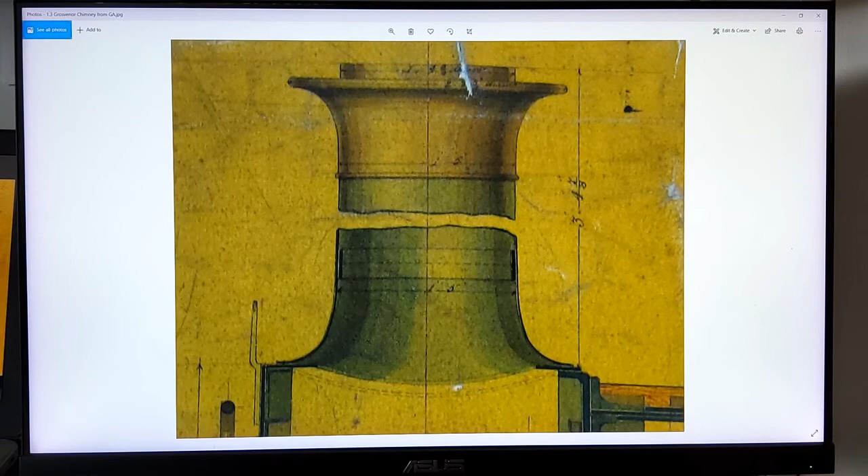To get research, I went to the NRM at York, photographed the general arrangement plan for this, and have also looked at some photographs, cropped them so I can see a little bit more detail on the chimney that I'm trying to draw.

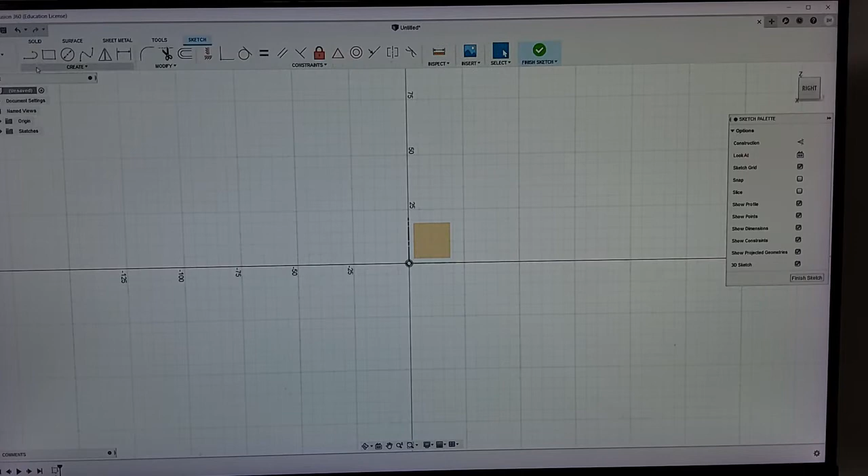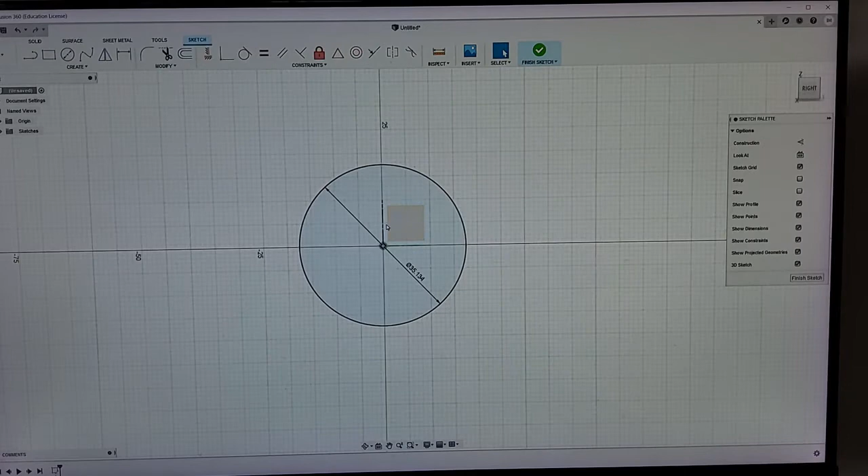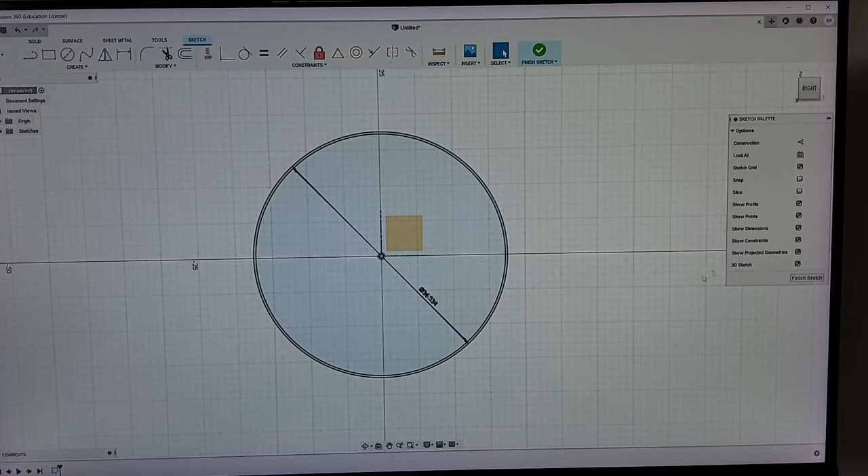And the second one I'm going to draw is slightly smaller than that, just to give us a bit of thickness for the smoke box wrapper, if you like. So 0.3 less each side is going to be 34.534. So I've got two circles, finished my sketch, put it in 3D, and I'm going to extrude that out to give me what looks a bit like the smoke box.

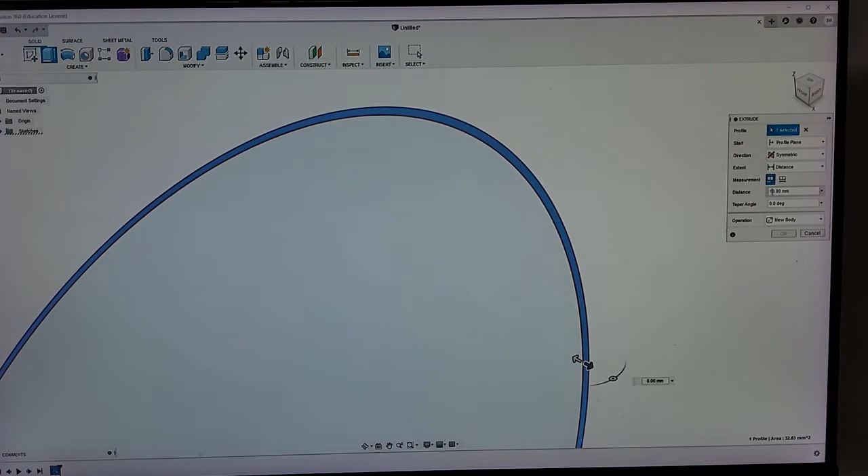I'm going to click in between those two circles. I'm going to have a symmetrical extrusion, and I want the symmetrical extrusion to be 20mm in total, which is 10 either side of the centre line. So that's what I've got there.

Click on there. I'm now going to draw on this top plane here another circle, and this time it's going to represent the size of the base of the chimney where it intersects with the smoke box here. So on my chimney it's 2'4", which in 7mm is 16.333. So that's that. Let me finish that sketch.

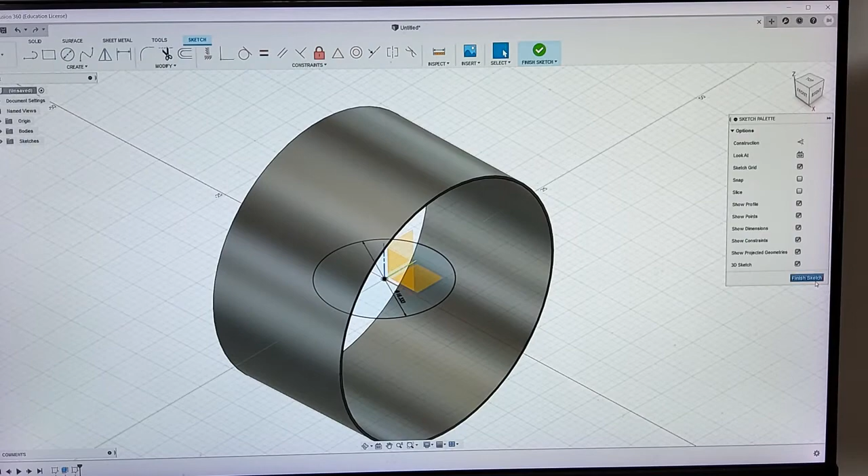And then I'm going to extrude that and bring that up through, and you can see it's cut a hole in the smoke box wrapper the size of the base of the chimney flare. Well, I don't want that to happen. I want to actually have the bit that's cut out. So you just click over here on the operation, change it from cut to intersect. So that's what we've got now. Click OK.

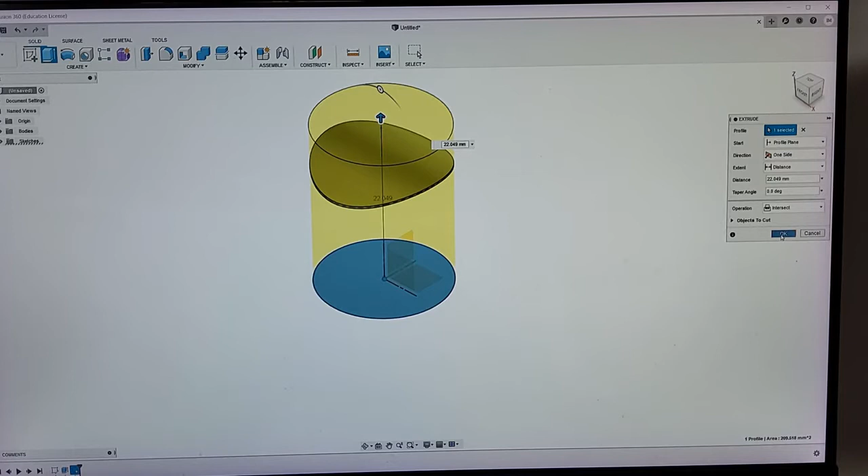The next thing is to put in some parameters so that I can move things about in a minute. So we have change parameters on the modify command, and click on the plus button, and the first one of these is going to be called height, and I'm going to have that as 2.6mm, and that's going to be my flare control height.

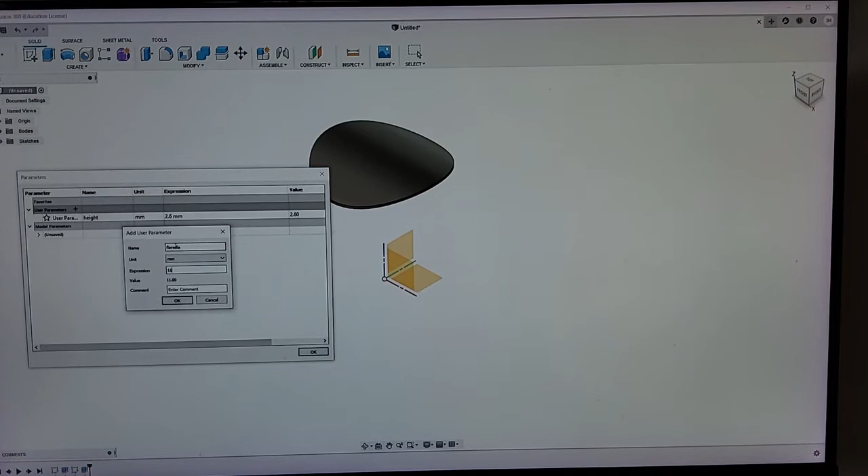And the second one is going to be the flare diameter, and I'm going to put that in as 11mm, and that's the flare control diameter. And I'll show you those in use in a moment.

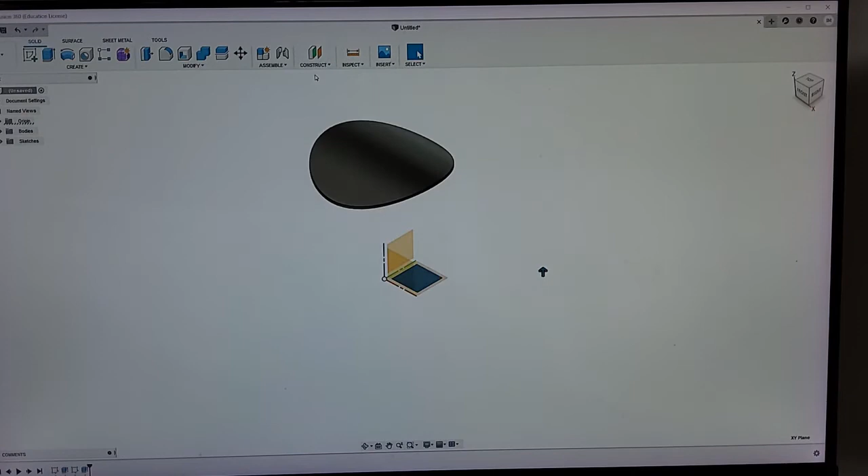Now from this plane here, I want to put some offset planes, and the first one, you can see I've got a thing up here. First one's going to be 22 millimeters above the centre line of the smoke box, so that's fine there. I'll just show you that from the front. Oh no, that isn't the front, is it? There's the front. That's the curve of the smoke box, and I've just put in this line up there to give me an area to work to.

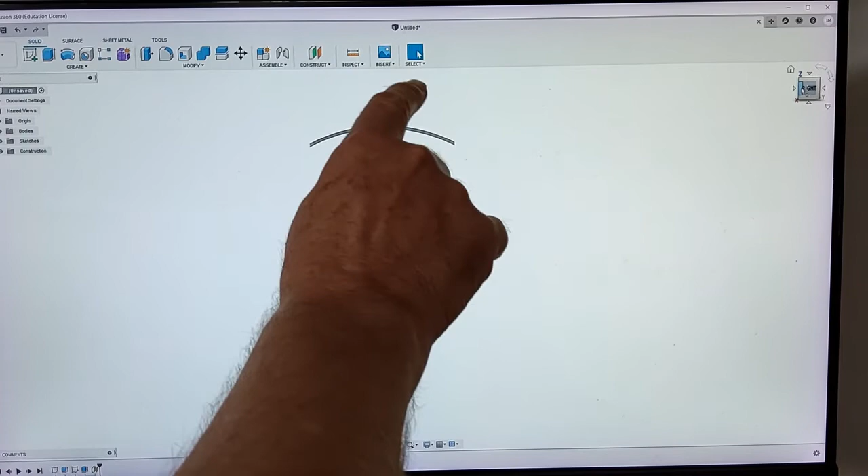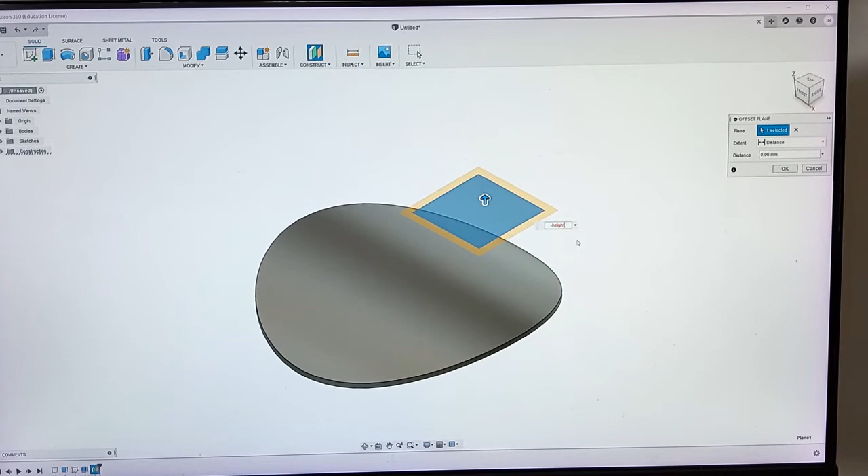And then from there I'm going to drop another offset plane, and this time instead of a dimension I'm just going to put in minus height, and you can see it's come up height user parameter underneath there, so I put a minus sign before it, click on there and it comes down and you've got the 2.6 figure there. So I've now got two planes above the base of the chimney.

The top one I can draw the diameter that is the top of the flare or the base of the barrel of the chimney, and the other one I can put on my flare control diameter user parameter, and that will allow me to change the shape of the flare as and when we need to.

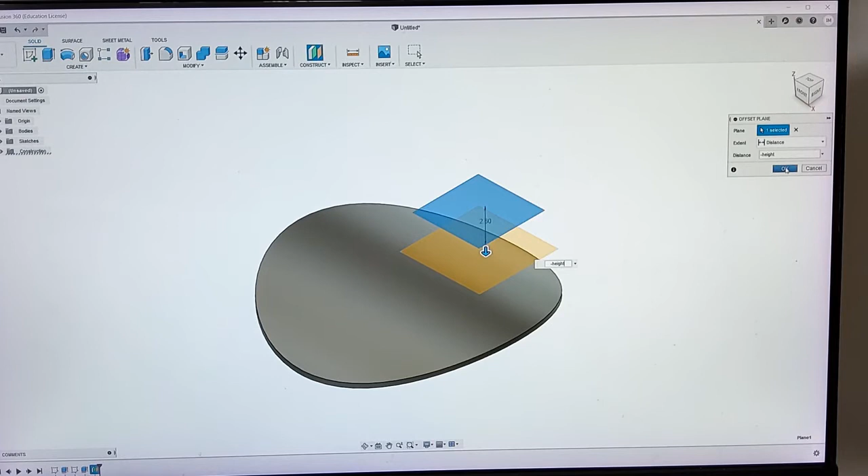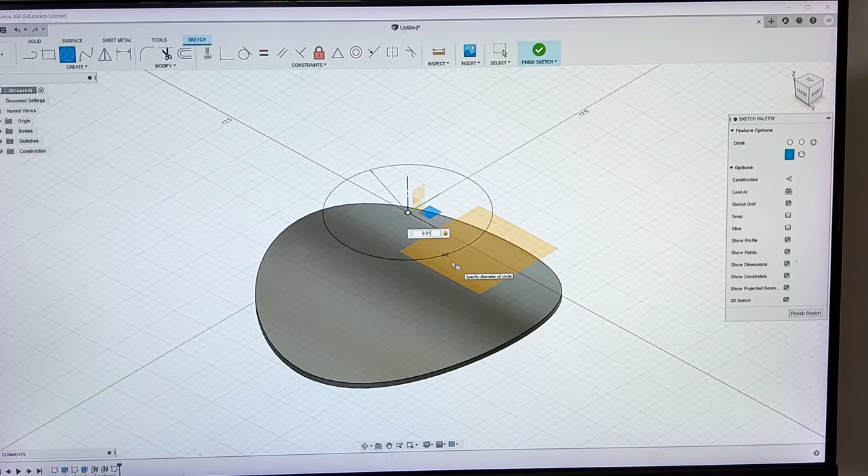So I'm going to draw two circles now, so we finish with the offset planes, and draw on the planes again. The first one, as I say, the diameter of the top of the flare or the base of the barrel, which in this Stroudley chimney is 1'5", 7mm, 9.9167. There we go. That's in there, and finish that sketch.

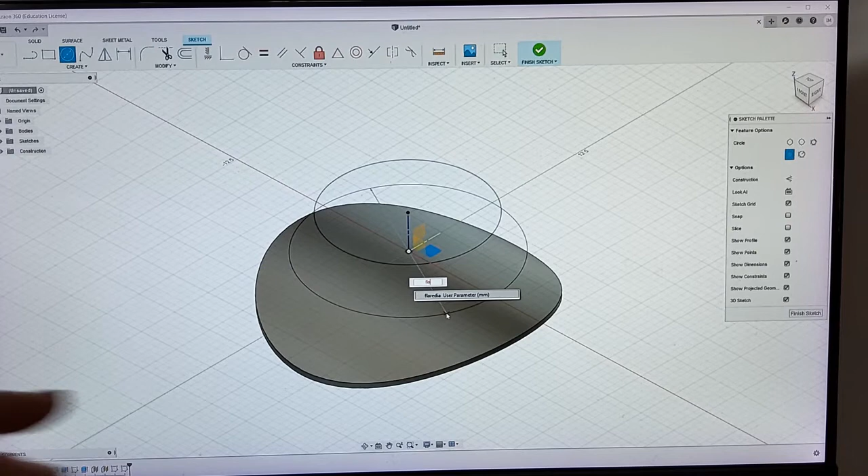And then I'm going to draw on this plane this time, and click on there, and draw a circle, and you can see it's below the other one, and that's going to be my flare diameter user parameter, and that we said was 11. So I'll finish that now.

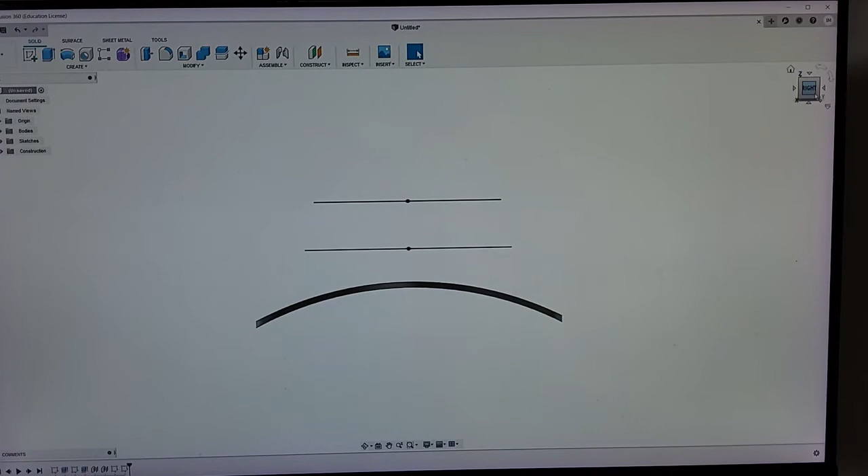So from the front view this time, I've got two circles, edge on, and this size of the base of the flare, and what I'm going to do is join these edges up to create the base of the flare. And you do that with the loft command, which is here, and you just literally click on the edges of the three circles that I've got.

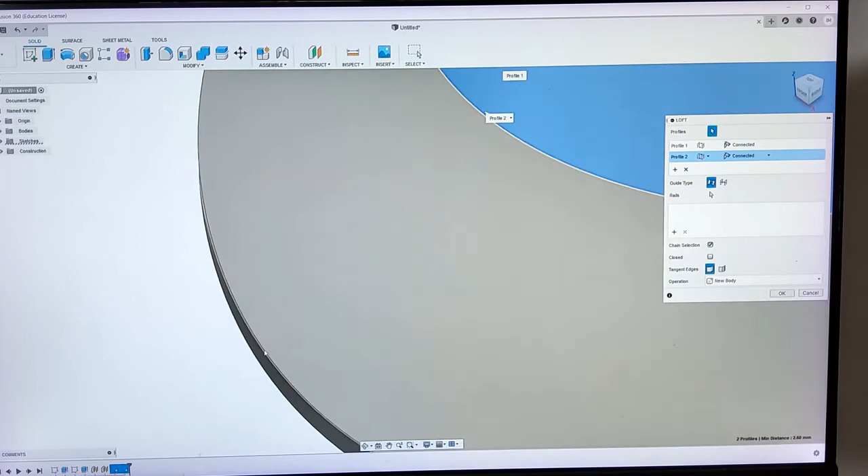I need to zoom in on the base because it needs to be the top part, not the bottom part of that. There we go. And if I now zoom back out again and click OK here, you can see I've got the front view of the base of the chimney, and there's the side view of the base of the chimney.

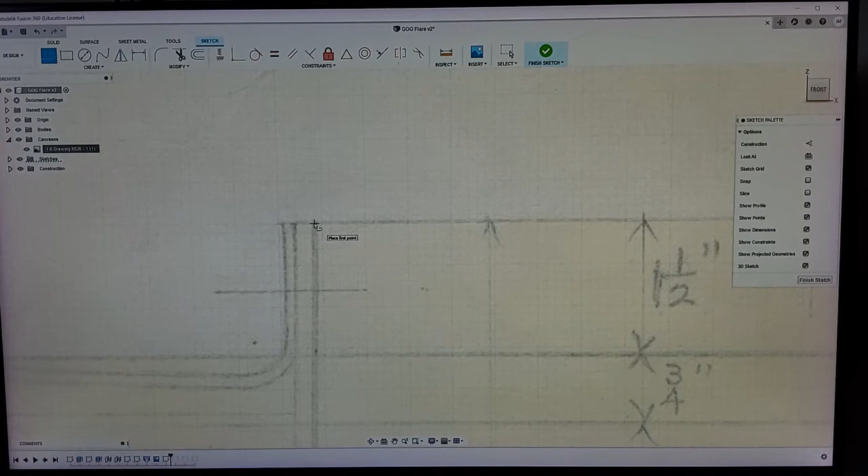Right, so I'll start drawing the cap. I've had to make the drawing in the background slightly lighter because otherwise I can't see the lines. So I'll click over here, and this is the edge of the barrel. So from there to here, and then the line down. You can see I've got help with the angles and things, and I need to draw from there an arc.

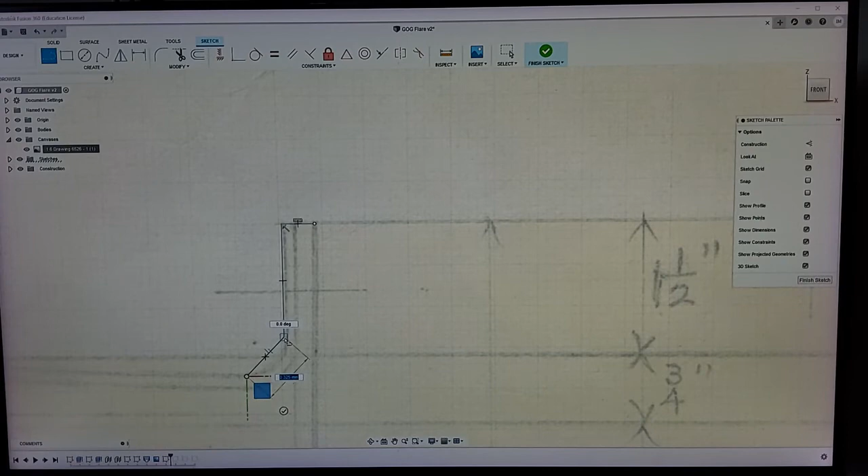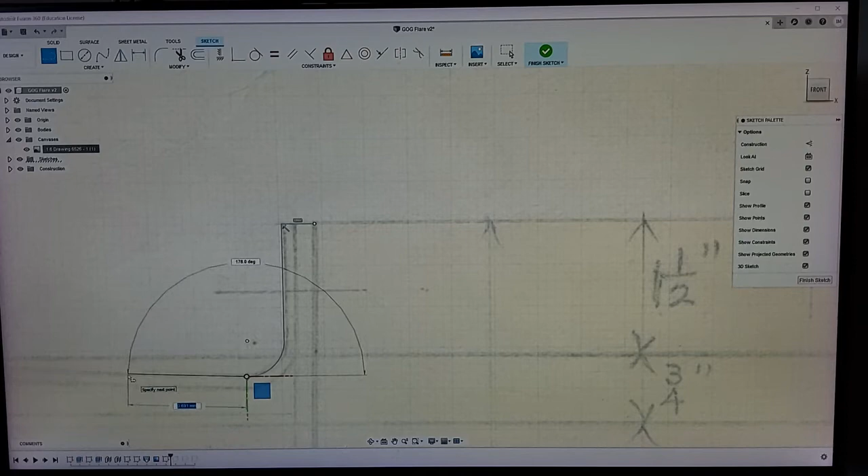It says arc, 3-point arc, that's better. From there to there. Right, I'll get rid of that other line while we're at it. There we go. Oh, and the other one. And then go back to a straight line again, which comes up very slightly, a slight angle, and then you get a very slight sort of curve from here up to the edge.

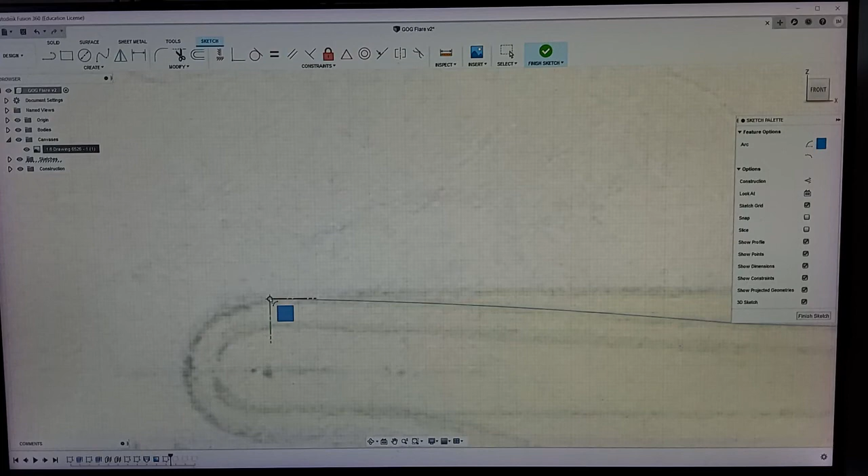So I'll just go to the arc command again, and very slight, a bit like that, and then from here I'm going to draw around to here. Right, now I need a straight bit again.

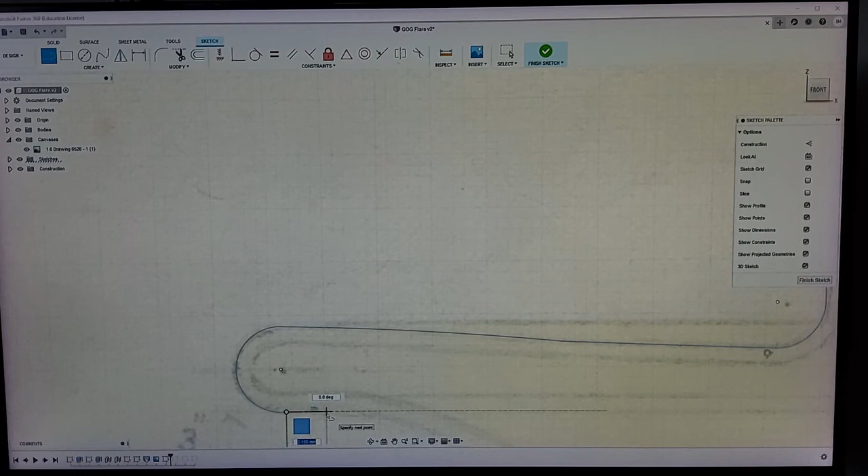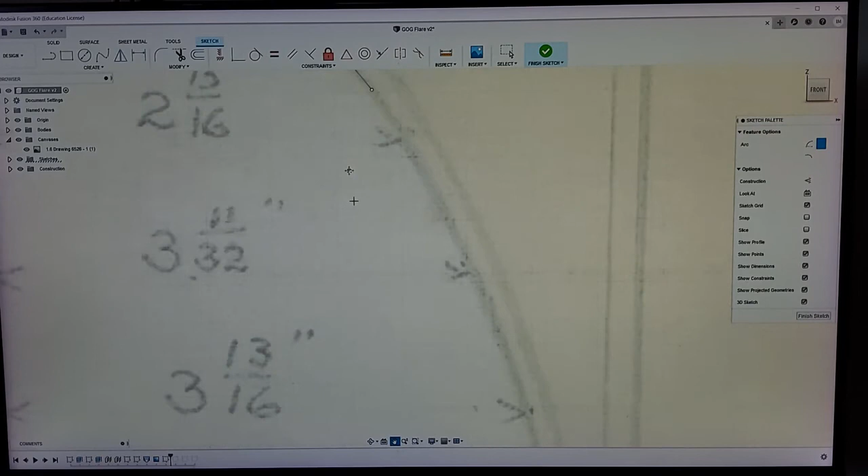And then we start on the curve again, so let's just move up a minute. Somewhere right about here. Looks about right. And then I draw another curve from here to somewhere down about here.

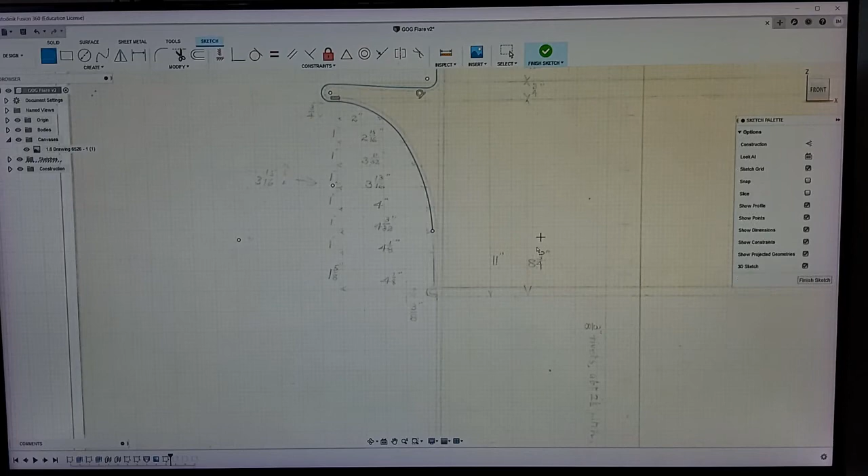And you can see that you start to see the outline or the profile of the cap coming in now. And I think the last bit of that is going to be straight to about there. And I've got some more curves again, or arcs, from there to approximately about there. And then from there round to approximately there.

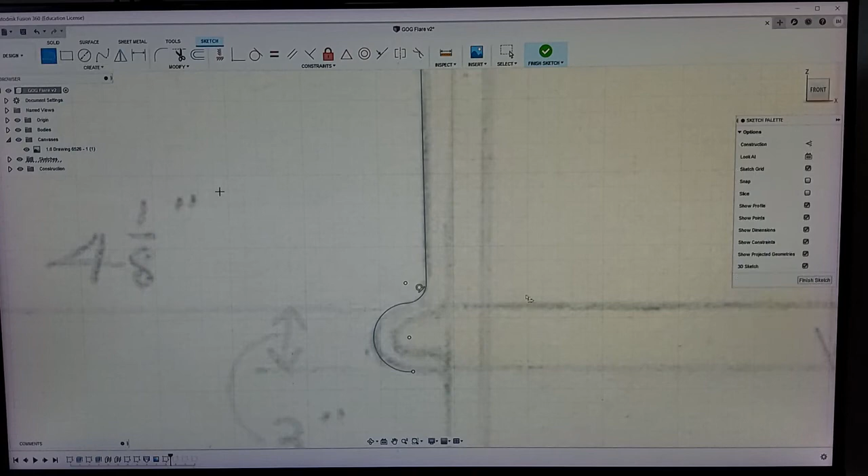And then a little bit of straight into this part here, and this is now the barrel of the main part of the chimney, and I can come down to where I drew before, and I'm just going to put it very, very slightly below the height so I don't get any lines when I join the thing up.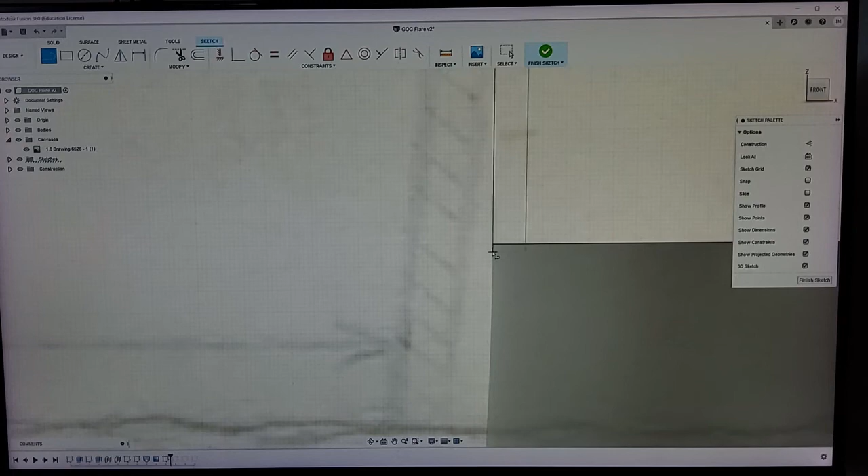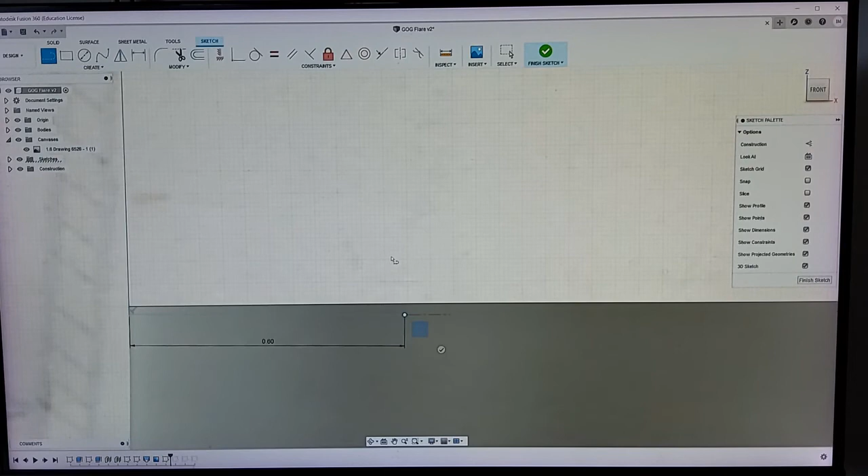There. And then the only place I really use the dimension is this last little bit here, where I want to have a thickness of the plastic at the side of about 0.6. So I'll put that in, and that'll give me a position there. And then we're going to go up parallel to this line. So I'll need to zoom back out again. And almost to the top of the chimney, which is something like about there.

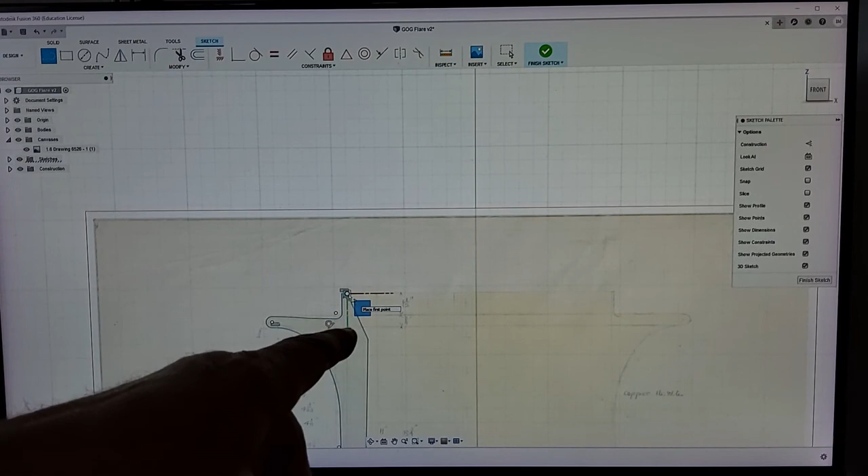And then I'll chamfer in the last bit so that the top looks as though it's full width, but it'll actually retain the thickness of the plastic for a bit of strength. So that's got the profile drawn, and so I finish that sketch. I'm going to turn off the canvas a minute and just zoom out. You can see I've got this profile here drawn all the way around. There's the original cap, there's the original base that I drew.

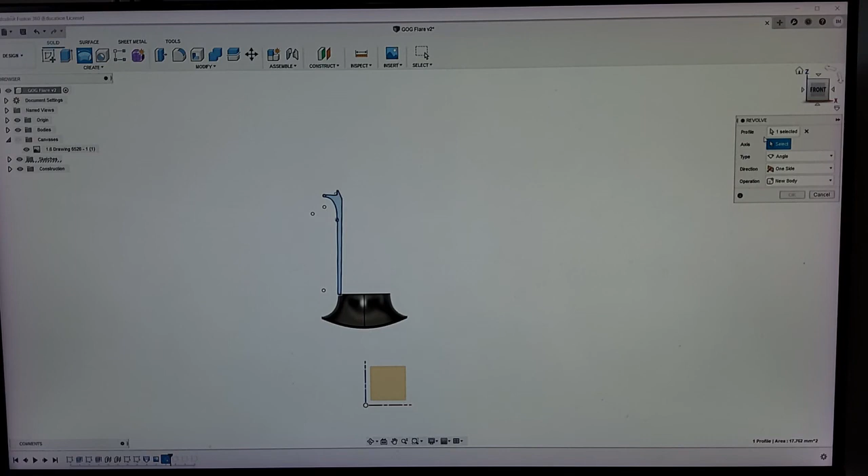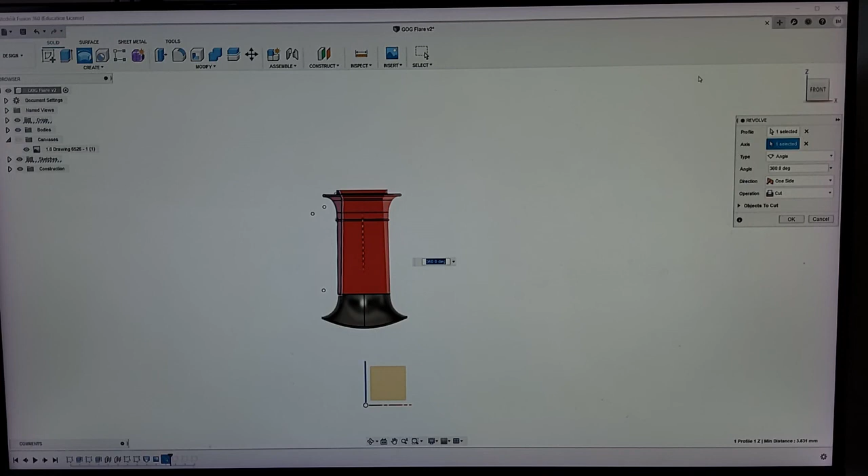So now I just revolve this profile, which has already been selected, around an axis. The axis I'm going to use is this one on the origin, and you can see I've now got the shape of the chimney there. But it's in red, which means cut, and that's because I went into the flare very slightly. So I just need to say over here, instead of cut, join, and it goes grey, the same as the rest of it. And now I've got the chimney. There's the side view, there's the front view, and there's the 3D view.